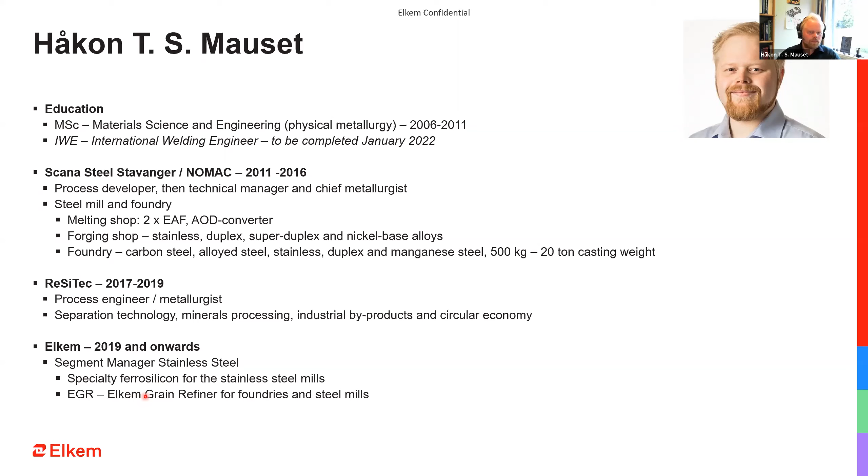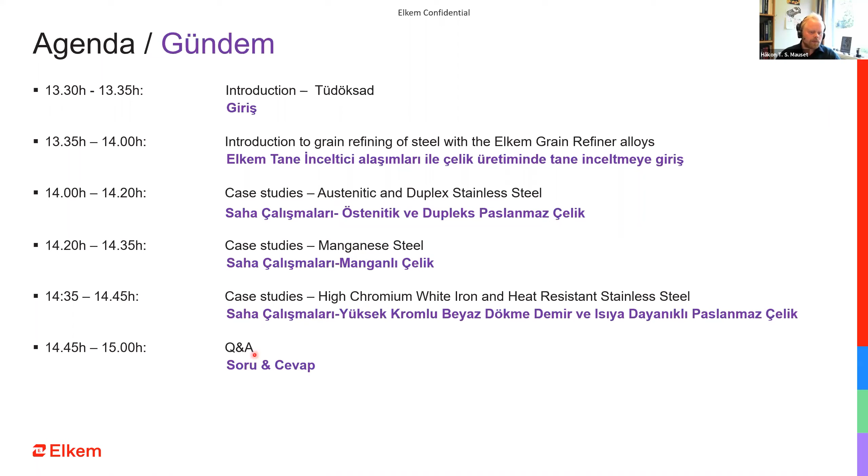So then I think we can just start to look at the agenda. We've had an introduction now first from Tüdöksad. Then the first part will be on the introduction to grain refining of steel with the Elkem grain refiner alloys, some fundamentals. Then we will go into case studies. First, we will look into the austenitic and duplex stainless steels. Then we will look at manganese steel or wear-resistant manganese steels. And then the final part will be on high chromium white iron and heat-resistant stainless steel. And finally, there will be some time for questions and hopefully answers as well.

So, first of all, introduction to grain refining of steel with the Elkem grain refiner alloys. First of all, what do you think are the benefits of grain refinement of steel? Well, what we know theoretically and also from practice is that you get increased strength and toughness. You should get better castability, reduced porosity, reduced hot cracking, and reduced segregation.

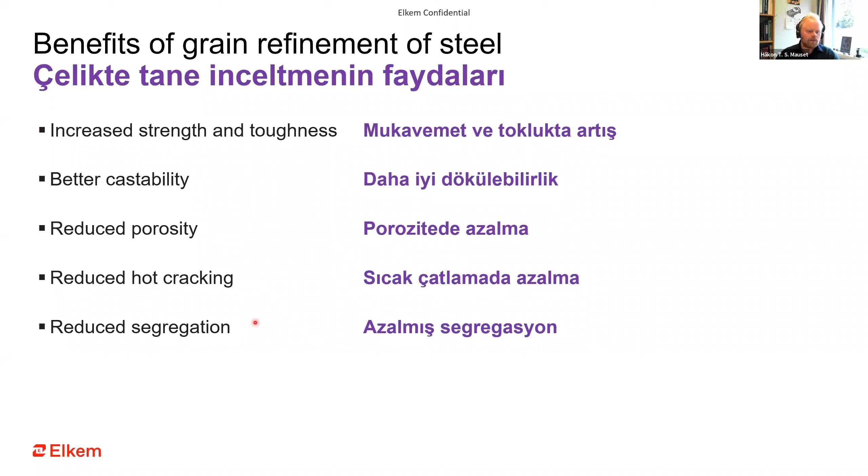Why should we grain refine steels? Well, when we grain refine steels, we can, for example, look at the mechanical properties and the Hall-Petch relation. This relation clearly shows us that the smaller the grains, the stronger the material. So we see from this curve that the smaller the grain size, the higher the yield strength. We actually see that by playing with the microstructure, the grain size, we get better mechanical properties. And also the nice thing about grain refining is that you don't only get strength, you also get better toughness during grain refining.

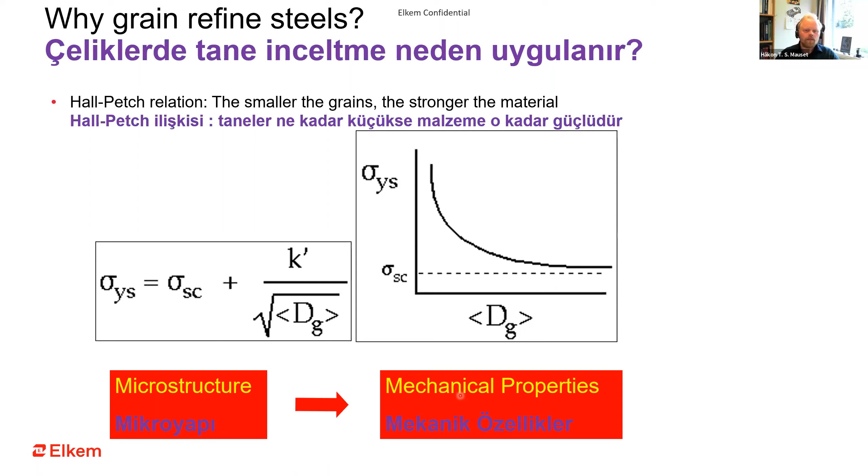So, but how does a grain refiner function? Well, what we believe, and what you see in the literature and theory, is that a grain refiner introduces particles or inclusions into the steel, which should give a finer solidification structure, better castability, and a finer final microstructure for better mechanical properties. Essentially, you create active inclusions in the molten steel, which modifies the microstructure both during solidification and finally, improving mechanical properties.

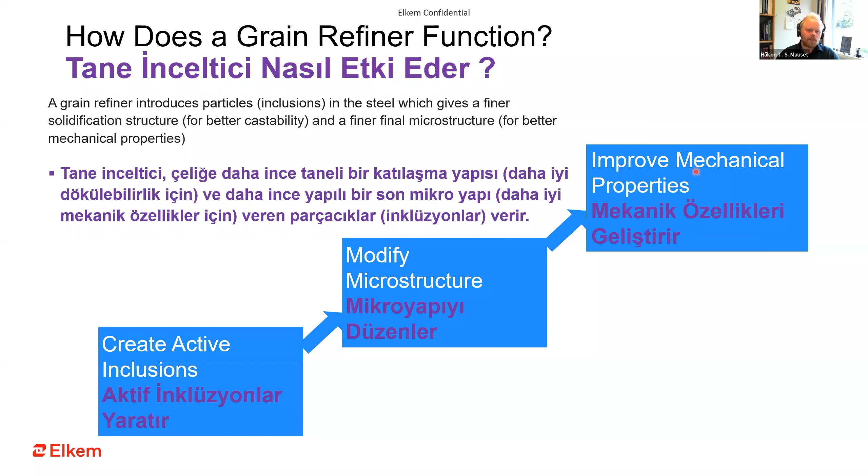But what are the requirements for a grain refiner? You need thermodynamically stable particles. It doesn't help if your particle dissolves in the steel. It needs to be a thermodynamically stable solid particle.

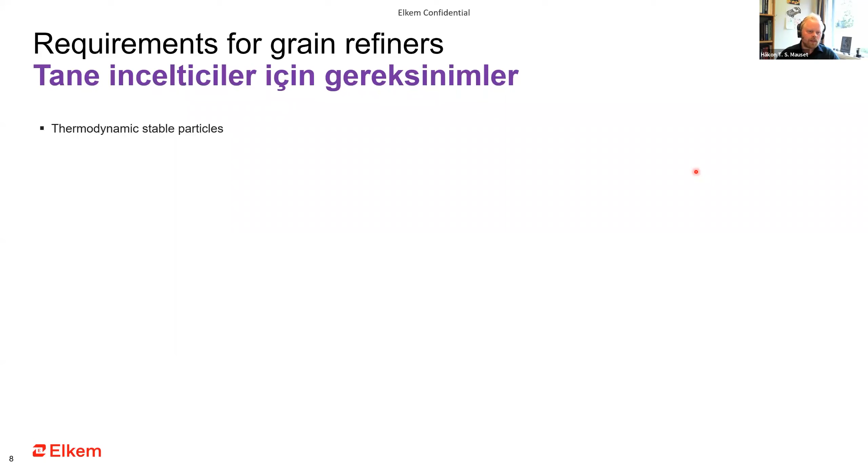And then there needs to be a low misfit between the formed inclusion and the solidifying metal. This can perhaps be a bit difficult to interpret. In this figure, the upper right one, we have degree of undercooling on the y-axis, and degree of misfit on the x-axis. When we speak about misfit, these inclusions or particles used for grain refining can be various oxides, sulfides, or oxysulfides, and the lattice structure of the particle needs to fit well with the solidifying steel.

So if we look at this figure, we see that manganese oxide, MnO, is up at the far right corner. It has a very high misfit between the solidifying steel lattice and the MnO matrix, and you would need a very high degree of undercooling for MnO particles to be a nucleus for the steel. If you look down here, which has very low misfit, it requires very low undercooling - that's cerium sulfide. We also see that rare earth oxides in general require very low undercooling and have a very low misfit.

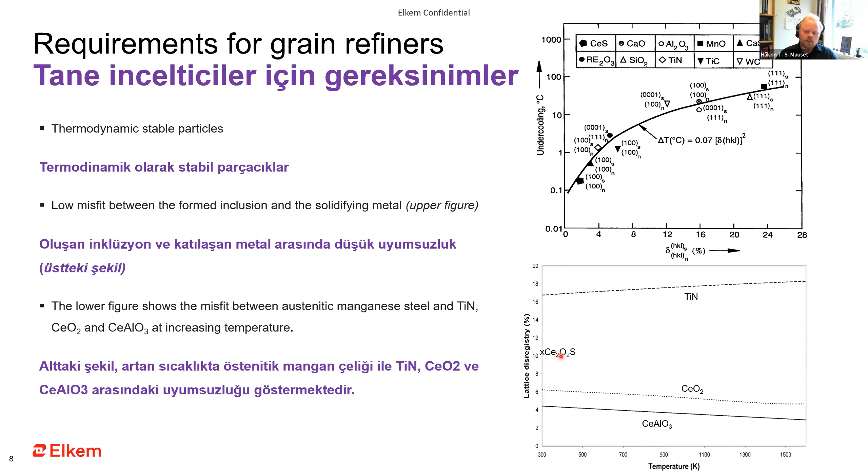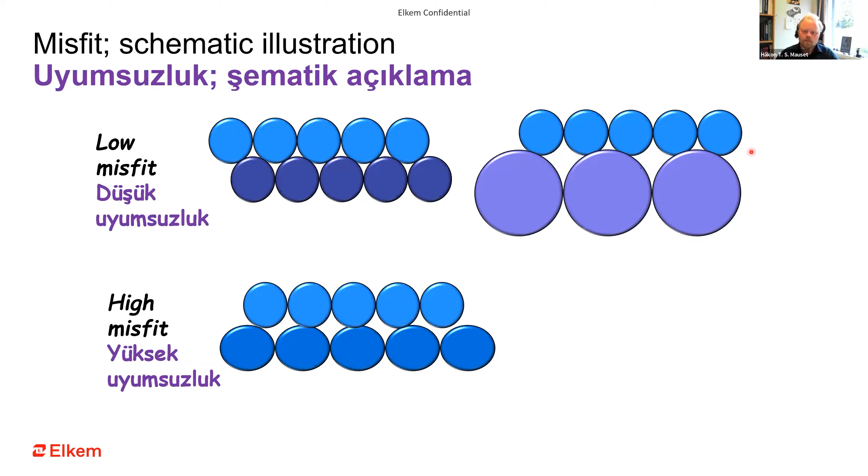So how do we obtain the proper inclusions to get grain refining? Well, we could do like in aluminium, by adding the specific inclusions needed - for example, titanium borides in aluminium. Or we can choose another way, which is what we've done at Elkem: we do it by alloying, so the actual inclusion is a reaction product from the alloy we put into the steel.

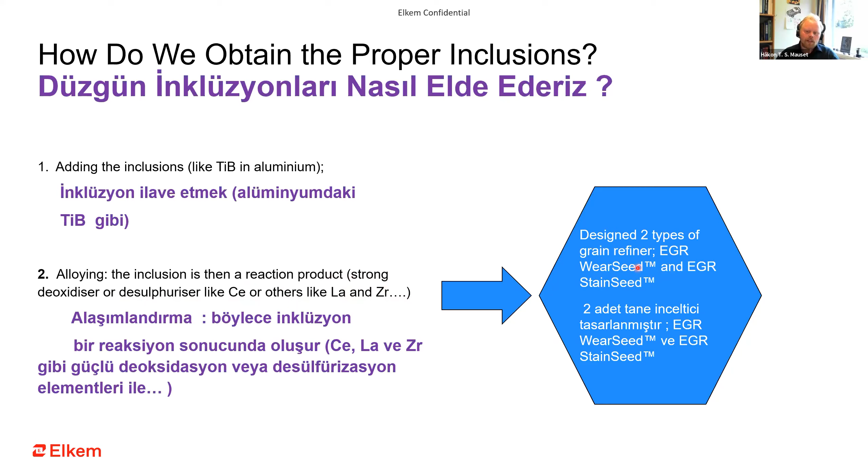Typically it's a strong deoxidizer or desulfurizer like cerium or lanthanum, zirconium, and other reactive elements that you can put into steel. Using this principle, we have designed two types of grain refiners: the EGR WearSeed and the EGR StainSeed. We will come back to them.

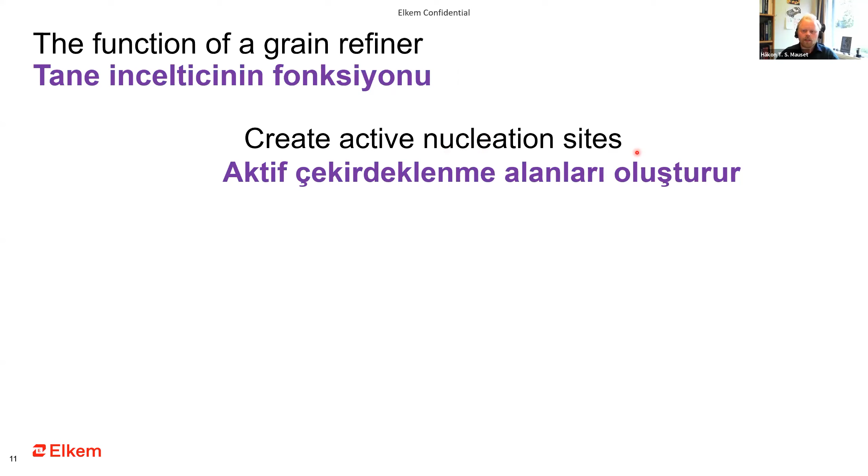So just for a small repetition, the function of a grain refiner is to create active nucleation sites for the solidifying steel. This improves the microstructure, and by improving the microstructure, we get increased mechanical properties.

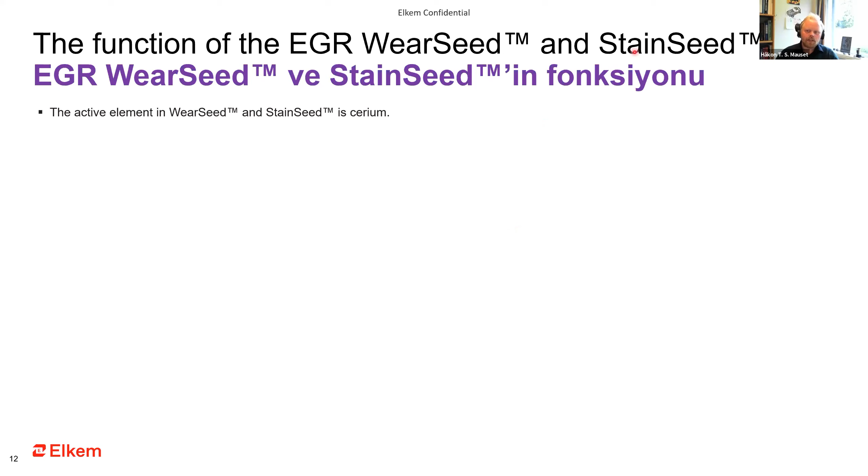So then we go into the actual grain refining alloys that we have in Elkem. That is the EGR WearSeed and the EGR StainSeed. And the active element in both of these alloys is cerium.

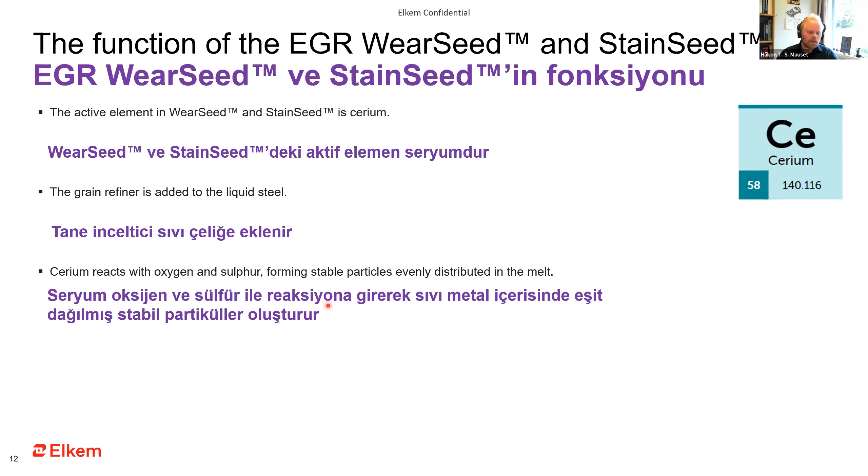The grain refiner alloy is added to liquid steel, and then the cerium will react with the dissolved oxygen and sulfur in your steel, forming stable particles evenly distributed in the melt. Depending on the amount of oxygen and sulfur in your steel, you will create cerium oxides, cerium sulfides, or even cerium oxysulfides. And if you have some dissolved aluminium as well, you can get cerium aluminates in there. All of these are suitable particles to promote heterogeneous nucleation and get grain refining in your steel.

So as I said, all these particles work as heterogeneous nucleation points during solidification.

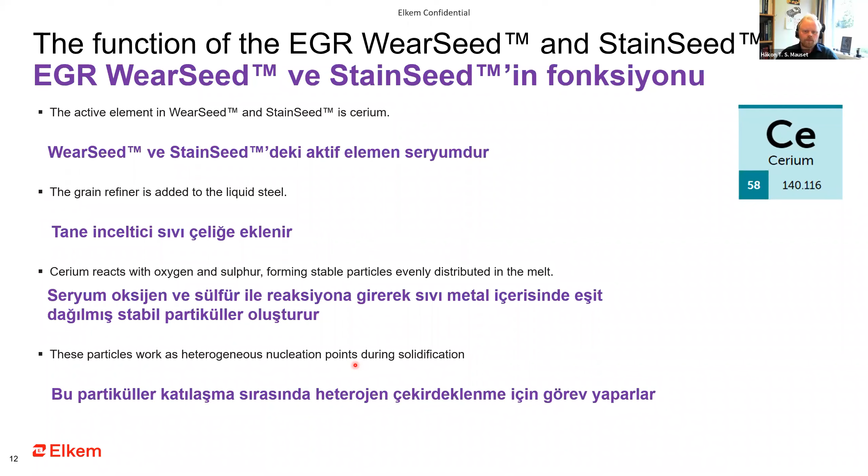So here we have the two alloys. First of all, we have the StainSeed, which is meant to be used for stainless steels. Its nominal chemistry is about 10% cerium, 20% silicon, 30% chromium, and then less than 0.15% carbon, as most stainless steels are very low in carbon. Iron makes up the balance.

The WearSeed is designed for manganese steel. Here we have quite similar, 10% cerium, 24% silicon, then 10% chromium, as a lot of manganese steel contains some amount of chromium. We have 24% manganese, and the carbon is less than 1%, which should be okay, as most of these manganese steels contain more than 1% carbon anyways. Iron is the balance of this alloy as well.

The standard sizes that we have for both of these alloys are 2 to 20 millimeter, and then 0.2 to 2 millimeter. But it can also be delivered as cored wire on request. And as I mentioned, the chemistry for both of these alloys mentioned here is the nominal composition.

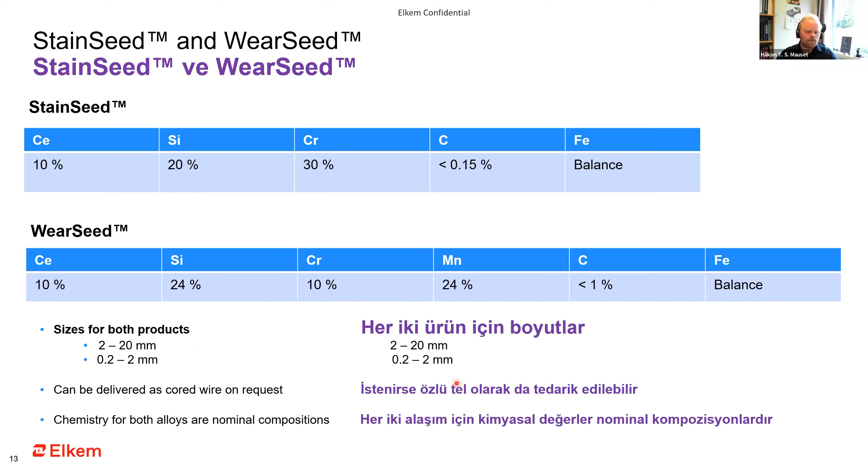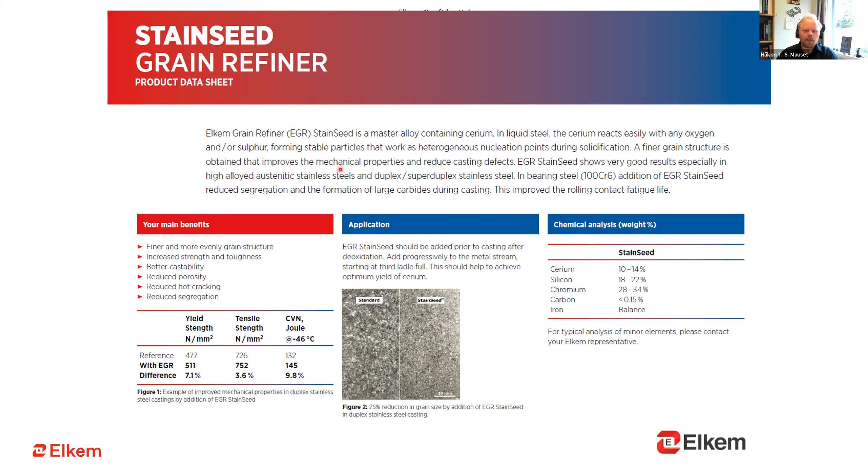So here you have the first page of the data sheet for the StainSeed grain refiner, which can be obtained by contacting Elkem. I will not go too much into this - as I said, this is just the first page, describing the alloy and showing some applications. We of course have the same for WearSeed, and both of these can be obtained from Elkem.

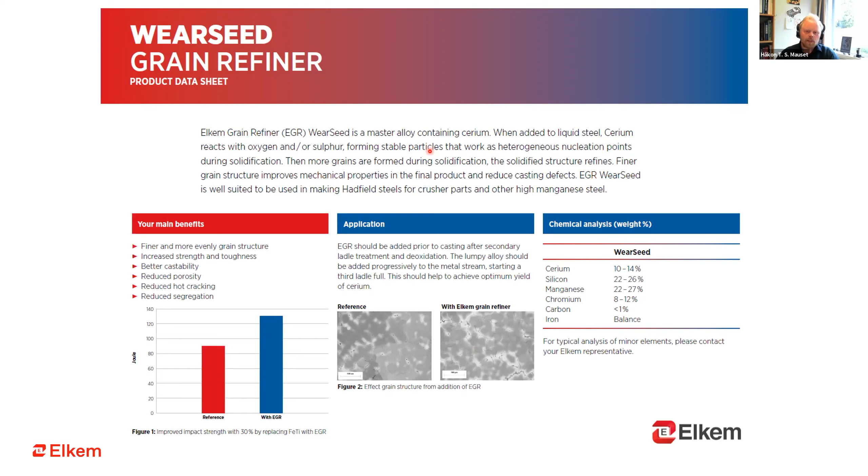So then we will look a little bit into how we actually add EGR during the production of steel.

The addition rate of EGR WearSeed and StainSeed is normally 6 to 7 kilograms per ton of steel. What we aim for is approximately 0.04 weight percent of cerium, or 400 ppm of cerium in the steel.

And the way we add the EGR into the steel is very important to do correctly. Typically, the addition of EGR is something you do just before casting. So typically here you have your induction furnace, your electric arc furnace, or your AOD converter, and you start to tap steel into your ladle.

So here we have the ladle. Usually you should try to fill it up about 1/3 with steel, and then you should start to add the EGR WearSeed or StainSeed. The alloy should be packed in bags, paper bags or plastic bags, between 5 to 10 kilograms in each bag. Then you should try to add it as evenly as possible between 1/3 and 2/3 filled ladle.

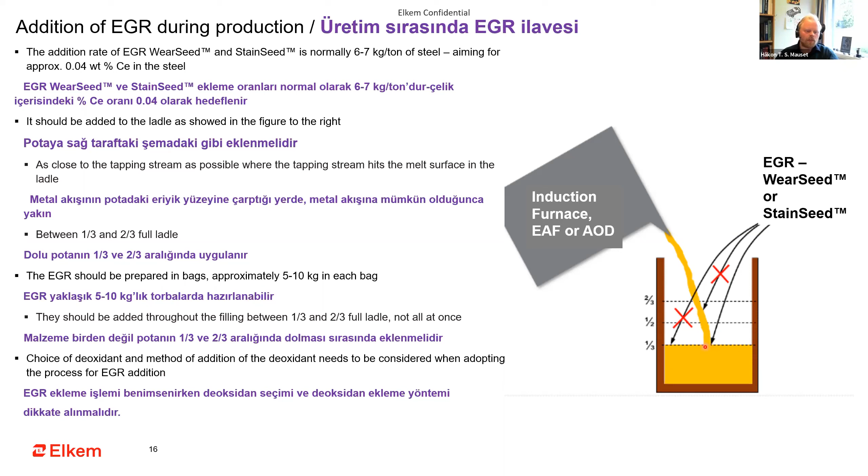So then we are actually finished with the general introduction to EGR. Now we will go more into the case studies. And then we will start off with the austenitic and the duplex stainless steels, and also super duplex.

So, what do we think that we theoretically can achieve by grain refining of stainless steels? Well, we expect to get a smaller grain size. We should have less segregation in our casting. This should give us better mechanical properties. Should give us less casting defects, and we should also get less weld repair on the castings.

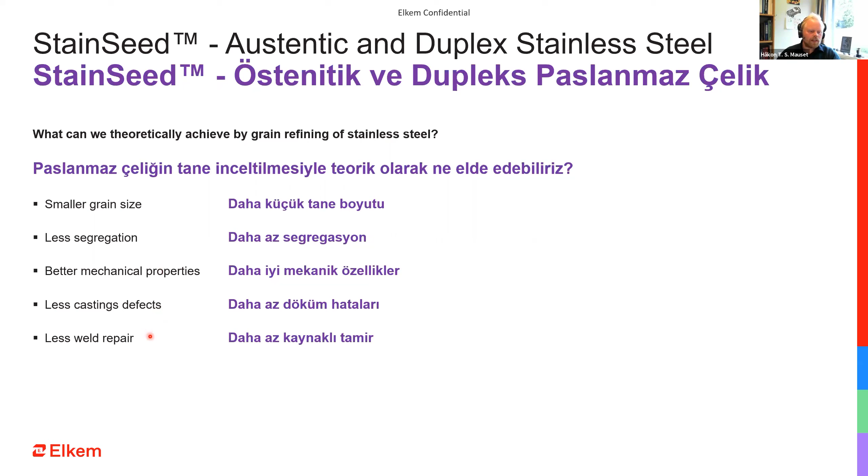This first case here is not from a foundry. This is from a steel mill producing ingots. This is the steel grade called 254 SMO. You see, it's a very highly alloyed super austenitic steel. 20% chromium, less than 1% copper, 6% molybdenum, and then around 18% nickel. Also, you see a lot of nitrogen. So it's a really highly alloyed steel, and usually segregates a lot during solidification.

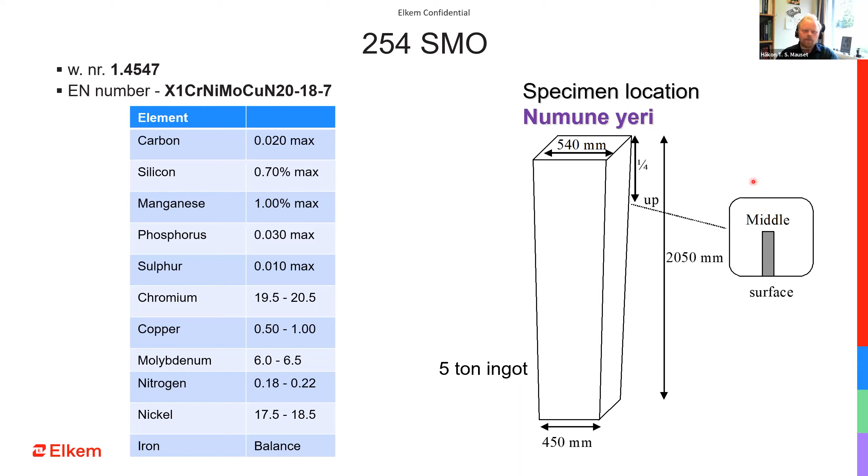But for this specific trial, a 5-ton ingot was cast. You can see it's about 2 meters high and 540 millimeters here on top. So what they did was that a quarter from the top, they cut out a slice, and then they took out this test sample here from that slice. So here you have the surface, and here you have the middle. 70 millimeters from the surface of the ingot.

Before this steel mill used mischmetal for grain refinement of this alloy, and mischmetal is of course a mixture of cerium and lanthanum. This is how the microstructure looked like 70 millimeters from the surface - quite coarse grained. While here you have the results after they used Elkem grain refiner with just cerium. You can see there is a big difference in the microstructure here - a much finer dendritic structure when they replaced mischmetal with EGR StainSeed.

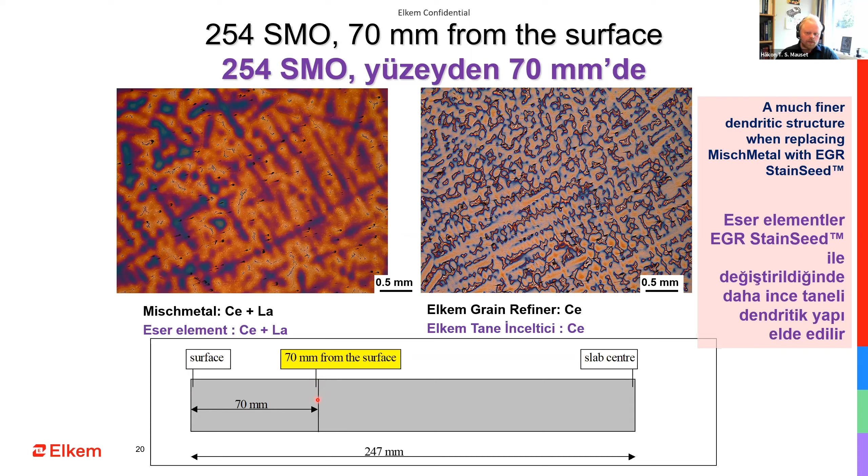So this is the test bar that I showed you earlier. Here we have the surface of the ingot, and now we're looking 70 millimeters from the surface. If we then go into the center of the ingot, we see it's an even more coarse structure when they used mischmetal. And here you can see it's much finer with the EGR StainSeed.

And what they actually saw was that normally this steel mill, they had a lot of problems when they were forging these ingots into bars. They got a lot of cracking during forging, and they had to do a lot of grinding of the ingot and also the forged bars. So it took a lot of time, and they lost a lot of money when producing these grades. But when they started to use the EGR StainSeed, they had no problems anymore with cracking during forging.

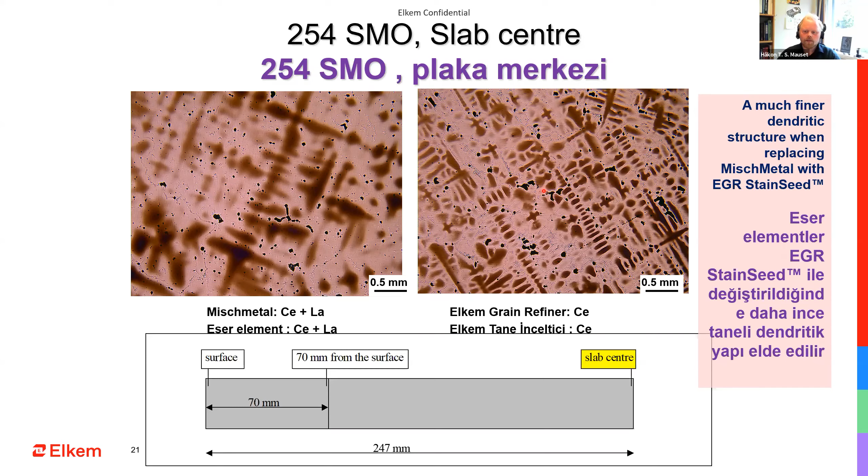Then the next trial was 254 SMO castings at a foundry. They had problems achieving the mechanical properties for these castings. Both impact strength and also the tensile strength was a problem. And they had problems with the surface. They had to do a lot of weld repair on these castings. I think it was valve bodies. But when they started to use...

EGR StainSeed, the Charpy impact properties went up more than 65%, and they saw less variation between the single values. As you all know, during Charpy testing, you have 3 samples that you test, but the variation between each of these samples was very, very little when they started to use EGR StainSeed.

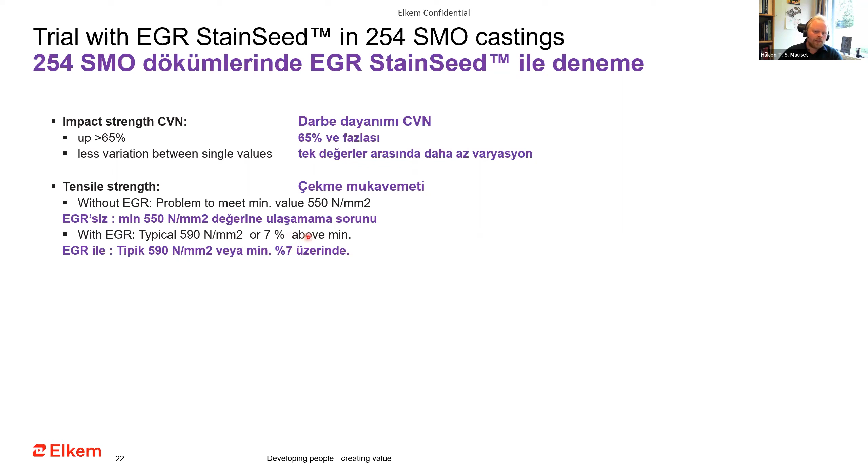With regards to tensile strength, when they didn't use EGR, they had problems to meet the minimum value of 550 megapascals. But with EGR, they typically achieved 590 megapascals, so more than 7% above the minimum requirement. The yield strength, they had a problem to meet the requirement of 260 megapascals, but with EGR, they achieved 290 megapascals, so 11.5% above the minimum requirement.

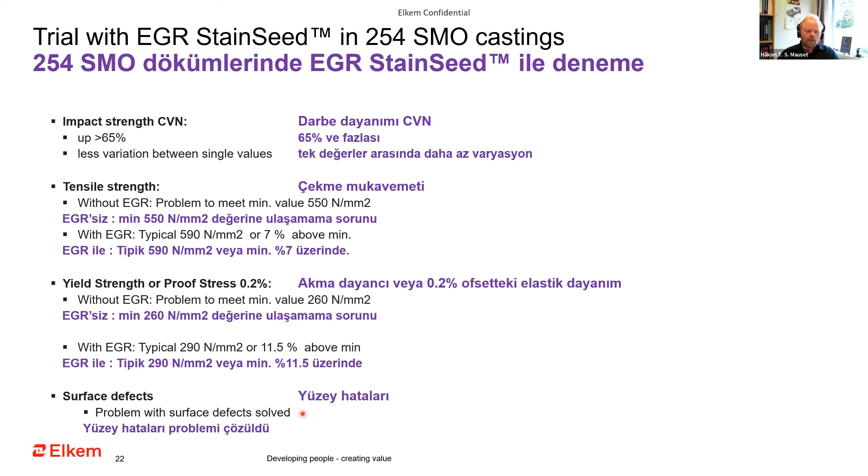And as I mentioned, they had a lot of surface defects, which they needed to grind and weld on, but the problem disappeared when they started to use EGR. So I think they didn't have any weld repair connected to the surface anymore. This is not the exact component, but this is a typical valve body.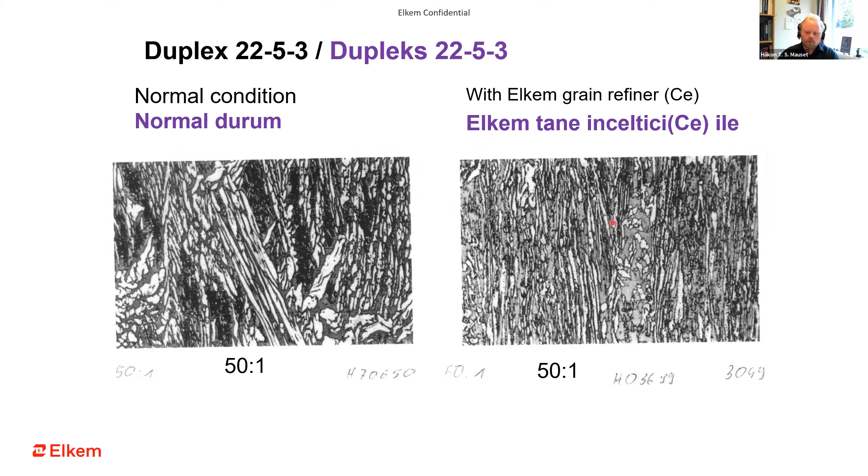And then with the Elkem, when they started to use the Elkem grain refiner, this is how it looked. So we see that the spacing between the ferrite grains is much more narrow when they started to use the Elkem grain refiner. So there is a definite grain refining here.

Then we have the 4A duplex, which is the 22 chromium duplex, but in cast version. This is not a customer, this is the reference casting, showing how their duplex structure looked like without any EGR in it. And this is how it looked when they added EGR. You can see it's lots smaller ferrite grains here.

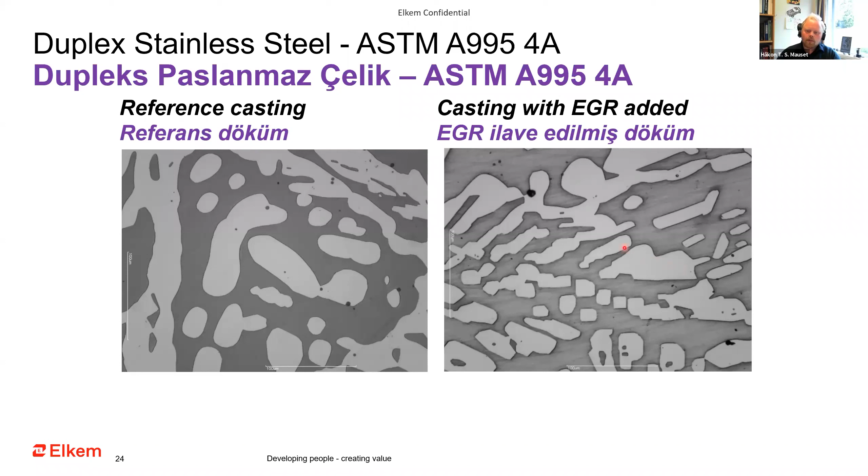So here we have, this is also the 4A grade. Here we have the reference. You can see that we have a quite big columnar zone, quite coarse columnar grains. And then we have this equiax zone here, where we see the grain size of the equiax grains. And this was without EGR.

But then when they start to use StainSeed, you can see there is very little columnar zone, and we can see that the equiax grains are much smaller. So the actual grain size in the equiax zone was 1.75 millimeters. And when they started to use StainSeed, the grain size in the equiax zone was 1.3 millimeters. So there was a reduction of 25%.

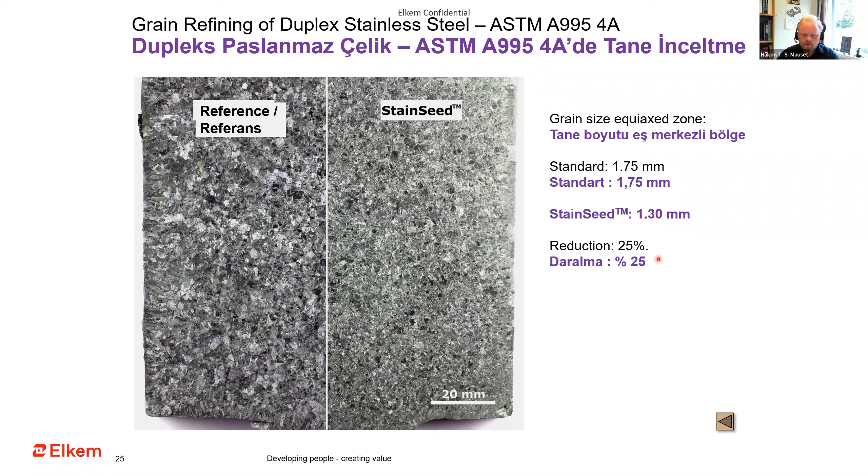So we're still at the 4A duplex grade mechanical properties. We will not dive too much into all of these numbers, but we typically see that for the yield strength, the reference was 477 megapascals. They achieved 511 megapascals, so that's 7.1% change. For tensile, the same, went up from 726 to 752, that's 3.6% change. And then perhaps the most important is the Charpy values.

You can see here that there is quite a lot of deviation between the 3 samples here. The average is about 132 joules. But if you look at the one with EGR, there is much less variation between the single values, and then we're at 145 joules. So an increase of 9.8%.

So this one you see here in these figures as well, that there is an increase in both yield and tensile strength when EGR is added. And for these grades, the most important is of course the impact strength. So you can see here that the reference, this is the average, but there is a big spread between the values. Well, here we have an overall better average and much less spread.

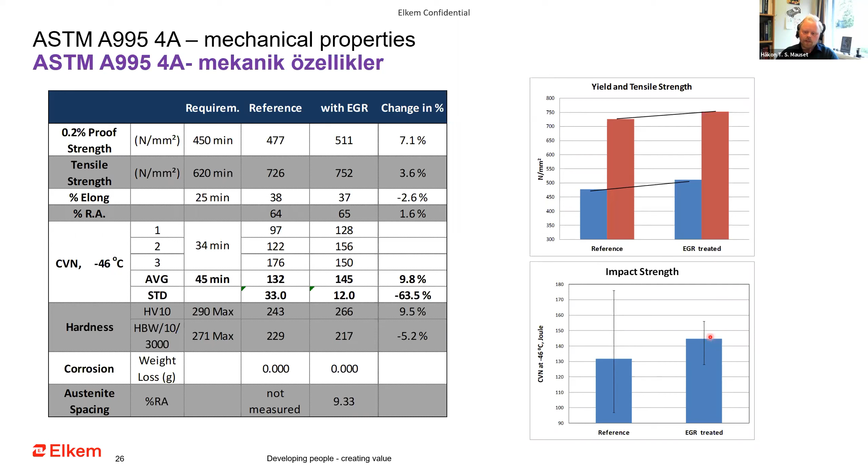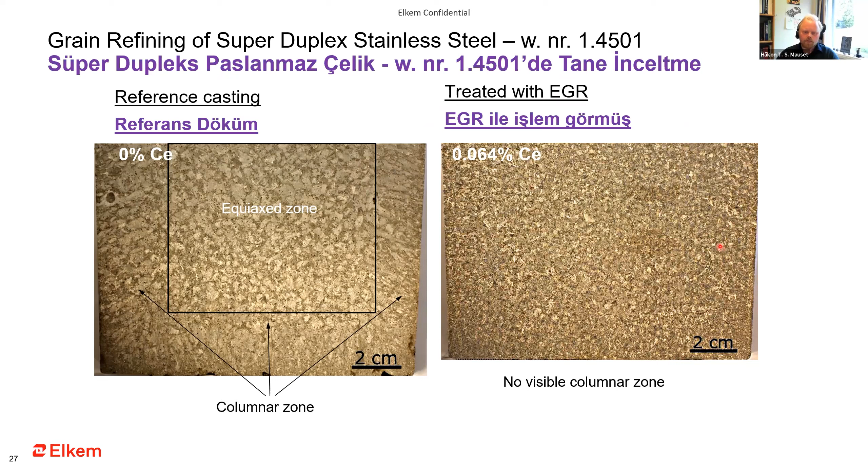While this is the one treated with EGR, here you see we have 640 ppm of cerium in the steel, and there is really no visible columnar zone here, and it's a lot more. The equiaxed grains are much smaller than this one.

So other benefits we've seen with EGR in duplex is better weldability and less repair welding on the castings.

So then we go into the wear-resistant manganese steels. What can we theoretically achieve by grain refining of manganese steel? Well, we think that we can achieve a smaller grain size, less segregation, better mechanical properties. And we think that these better mechanical properties should lead to increased lifetime of the crusher components.

We should get less casting defects. And we also think that by having a better solidification, we should have an increased casting yield, and thus it should be possible to reduce the feeder size. This one we have not worked on yet, we have not documented it yet, but it is something we are looking into. And of course, if you have a smaller grain size, then perhaps you could reduce the heat treatment time of these components.

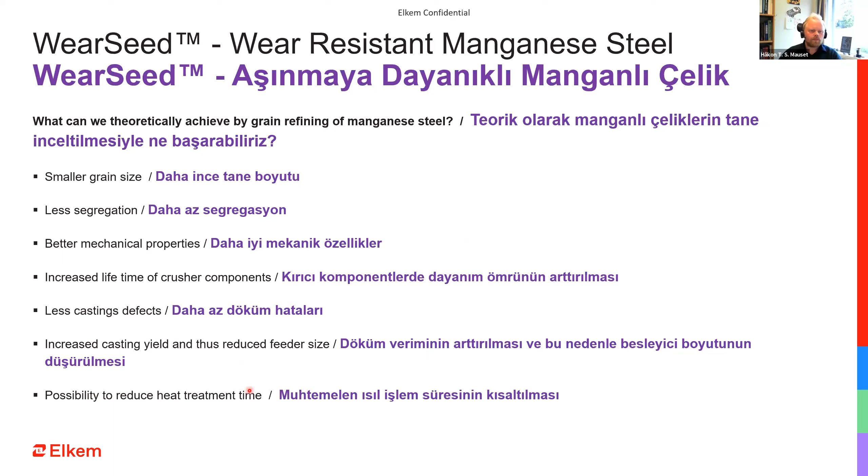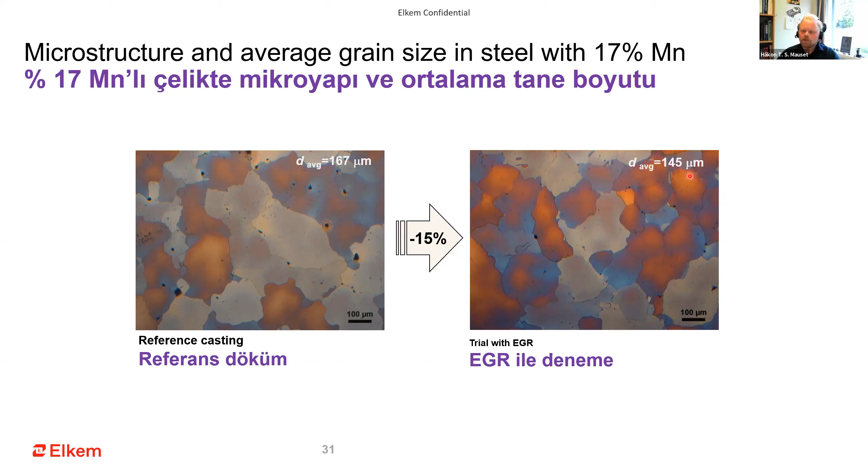So first we have the microstructure and average grain size in a steel with 17% manganese. This is the reference casting. You see the average grain size is 167 micrometers. With EGR, there was a 15% reduction in size, so the average is about 145 micrometers.

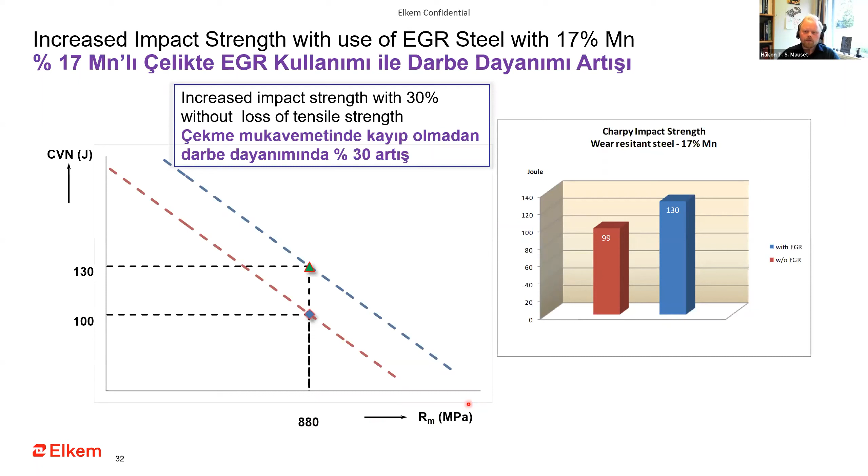Then we can look a bit at a 12% manganese steel with EGR. So for this one, we see what we have seen earlier, the Charpy impact strength at 20 degrees C, typically around 35 joules without EGR, but then up at 60 joules with EGR.

We see sort of the same here, a bit lower with EGR. When we look at the tensile strength, without EGR we are at 780, 800 megapascals, but with EGR we are more up at 840 to 860 megapascals. We also see that the elongation after fracture, the A5, increases as well, typically around 20% without EGR, and 25% with EGR.

So we see here the impact strength is up 50% without any loss of tensile strength. We actually get both increased tensile yield strength and tensile strength, but we also improve the ductility and the toughness of the material, and that's quite rare when you work with steels. Usually you have to choose better strength or better toughness, but here we actually get both, which is in line with theory, of course.

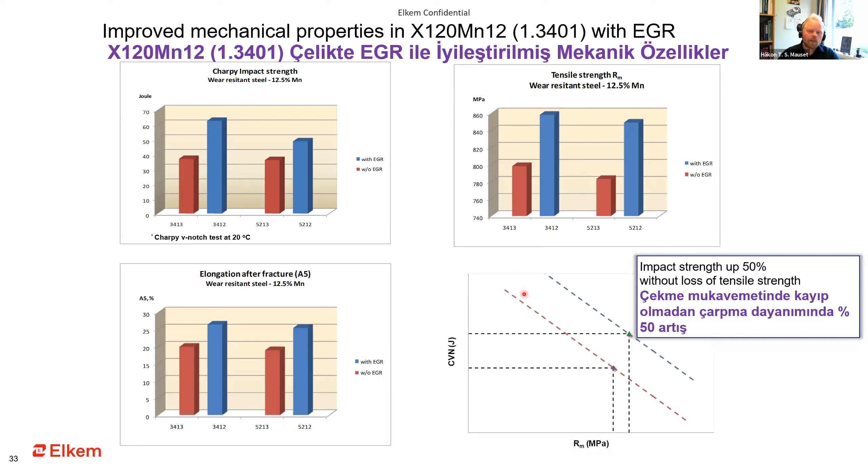Then we have a case with a 20% manganese steel. This is the reference sample. The scale bar here is 500 micrometers, and you see these grains are huge.

The normal practice for this foundry was to add 0.1% aluminium and 0.4% titanium to the ladle just before casting. We did some trials where we kept the aluminium, but skipped titanium, and added 0.7% of EGR instead. Then you can see that the grain size is substantially smaller, so here we have a really big effect of the EGR.

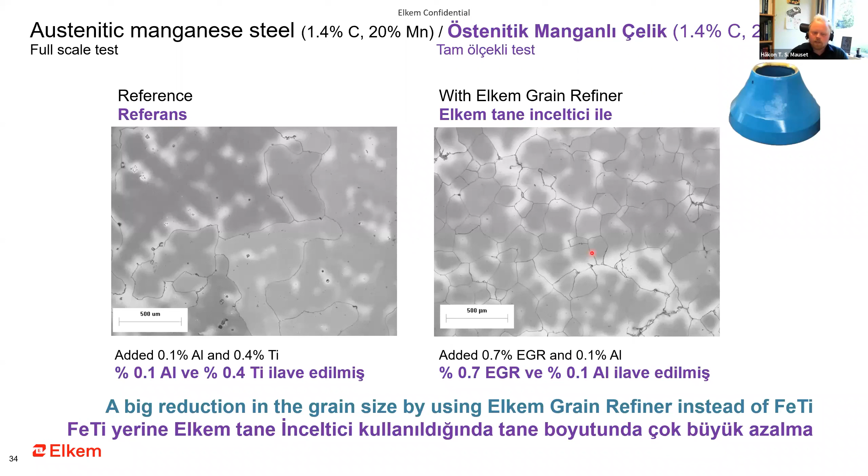Usually for these manganese steels, the foundries are not really interested in mechanical properties because the end user is going to use them to crush rocks, and all they're interested in is the actual lifetime of the components. Of course, smaller grain size should lead to better mechanical properties, which then should lead to a better lifetime for these components.

But this was the first trial where we actually saw an increase in the lifetime. This was shredder hammers made in a manganese steel, around 13% manganese. This is the reference casting. This red line here is 1 millimeter in length, so it's quite coarse grained.

Then when they started using EGR, this red line is still 1 millimeter, but you have much smaller grains. What this foundry, or the customer of the foundry, saw was they achieved a 25% improvement in lifetime of the hammers when they started to use EGR.

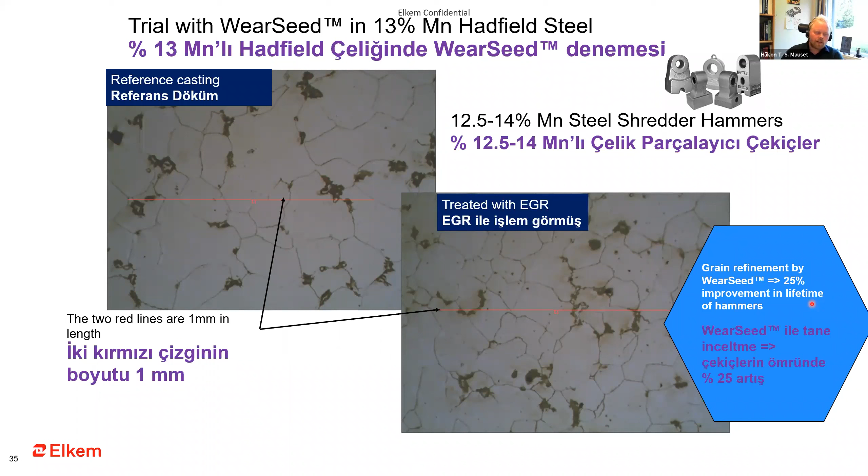But then again, for these manganese steels, we saw that we needed to have more actual lifetime data. The thing is that at Elkem, we have a lot of crushers around the world, and especially in the northern part of Norway, we have Elkem Tana, which is a big quartzite mine. They have a huge jaw crusher and a huge cone crusher.

So we decided to do some trials internally in Elkem. We chose to make a manganese steel of 1.4% carbon, 2.5% chromium, and 20% manganese. We added 6 kilograms per ton of steel of EGR WearSeed. From this steel melt, we made the inner and the outer mantle of the secondary cone crusher at Elkem Tana. The total casting weight of these two components was approximately 5 tons.

These mantles were put in operation at Tana some time ago, and then they measured it. They have a continuous measurement of all the mantles they put into their cone crusher. They saw that these EGR treated mantles had an increase in lifetime of more than 50% compared to the average lifetime for the last 10 years. Actually, when we compared it to the last 3 years, it was actually a 100% increase in lifetime for these mantles. So that is, of course, very good numbers.

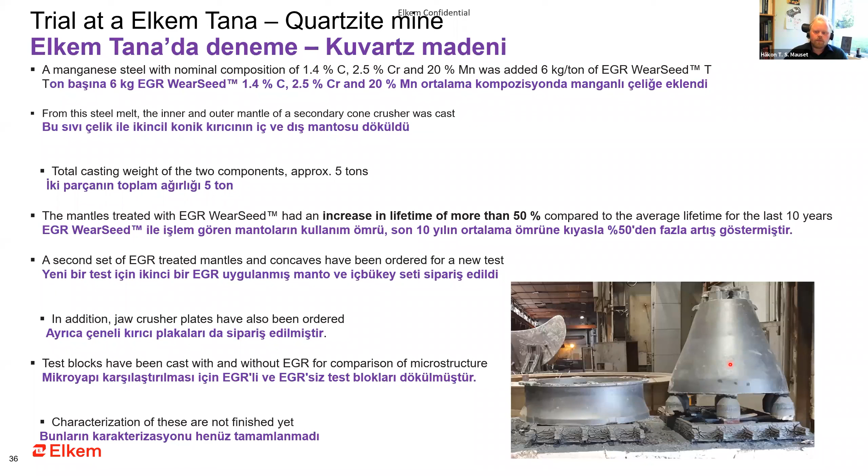So this is a bit of a side story. This is not wear-resistant manganese steel for mining applications. This is TWIP steel, which is typically 20 to 24% manganese, but they are continuously cast, and there are advanced high-strength steels.

So this is the reference casting from a continuous casting machine. No cerium addition here. And this is the side of the as-cast slab. And here we see a really coarse-grained columnar zone, and we see this typical cross here. And this is the center of the slab. Here you still see there's really large grains, columnar grains.

But then a trial was done with EGR. You can see that we have around 700 to 800 ppm of cerium. Here we have the side of the slab. So see, it's much more fine-grained. You don't see these columnar grains at all. And same here at the center of the slab. It is much more fine-grained, which should make it easier to hot roll later on, and hopefully it will be less susceptible to cracking during casting.

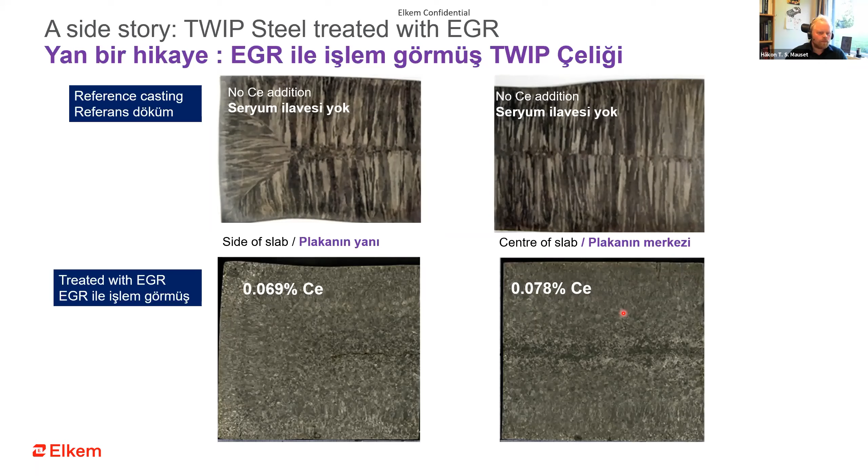So then we're moving into the last part here. We're running a bit fast through it. Now we will speak a bit about high chromium white iron and also heat-resistant stainless steel.

So what do we expect when we grain refine high chromium white iron and heat-resistant stainless steel? Well, as we've said numerous times during this presentation, we expect to have smaller grains. We also expect to have smaller carbides, and we expect that these will be well-dispersed carbides. And of course, we expect to have less segregation.

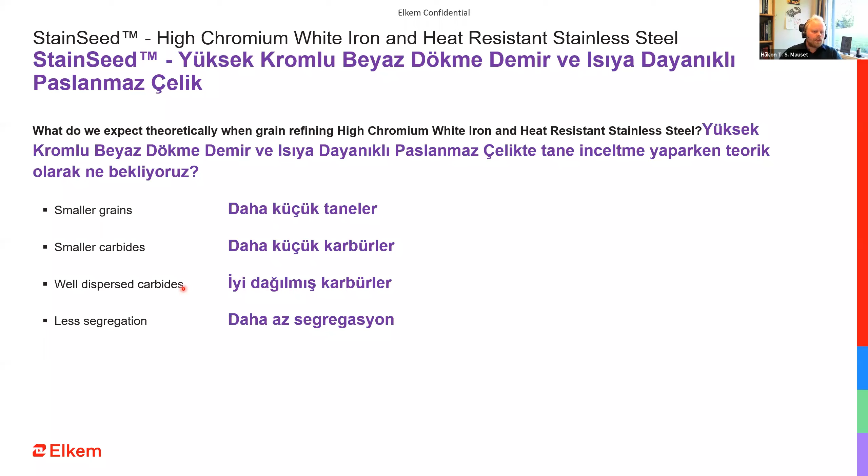Okay, first, high chromium white iron. Here we only have, so far, one case study we can show. This is a high chromium cast iron for rolls used in a steel rolling mill. The nominal chemistry of this grade was 3% carbon, 17% chrome, 1.5% nickel, and 1% moly. Then EGR StainSeed was added with 6 kilograms per ton of molten metal. And here you see the microstructure.

This is the microstructure in the castings without EGR, and this is the one with EGR. So what the customer saw was more and smaller equiaxed grains, and smaller and more well-dispersed carbides. So we saw everything we wanted to see in these high chromium white irons. This is of course a very interesting thing for us to look into, because Elkem has been very good when it comes to gray cast irons and ductile cast irons, where our inoculants promote graphite. But the white cast irons we haven't really worked much on. So we see now that there is an effect of EGR in these grades, and we will be working hard to do more trials at various foundries, to look more into the effect.

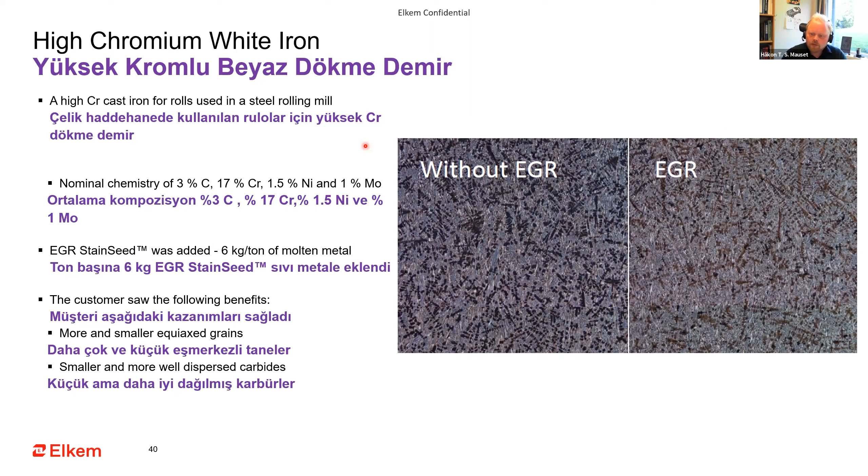Then we go into the heat-resistant stainless steels. This is from a customer. They use the EGR StainSeed, 2 to 20 millimeter, and they add 0.7%, so 7 kilograms per ton of steel. What we see here is cooler plates, and they make these in the ASTM A297, the HH grade, the HK, and the HD grade. So typically the chemistry we see here is 24% chromium, 11% nickel, and 0.4% carbon. So of course these stainless grades are really high in carbon compared to other stainless grades.

But what this customer sees is that the casting life is increased, the lifetime of the components when they are put into operation. Typically this can be used in cement production. So the lifetime of the component has increased, the heat resistance properties are improved, they avoid columnar growth, they see a smaller grain size. And actually this customer gives a much longer warranty on the castings that are produced with EGR than the ones without EGR.

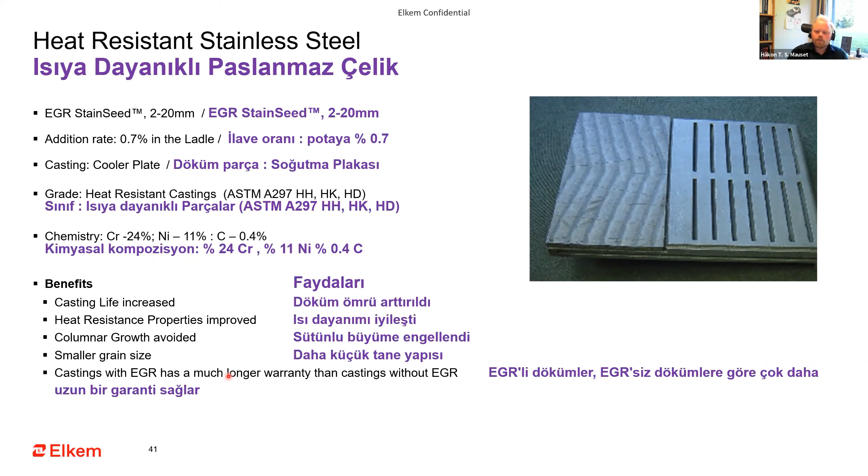Then we go into the exhaust manifolds and turbos. These heat-resistant stainless grades were originally made for industrial applications, like cement plants and steel mills, and everywhere you have high temperature applications.

Exhaust manifolds and turbos have traditionally been made in cast iron. But now we see in the industry that exhaust gas temperatures from engines have a steady increase as we get smaller engines with more turbos. So as temperature is increasing, a lot of manufacturers have to switch to heat-resistant stainless steel. Therefore it's interesting for Elkem to look into these exhaust manifolds and turbos and see if they are suitable candidates for grain refining with EGR StainSeed.

If you look at the typical industrial castings that these grades were made for earlier, they are quite large and thick components, while the manifolds and turbos are usually quite thin-walled. So there is a definite difference there. But the typical grades used by the automotive industry are in the ASTM A297, but with some modifications. It's typically the HF, HH, HK, and HU grade that they use, but often they add some niobium as well to get extra carbides.

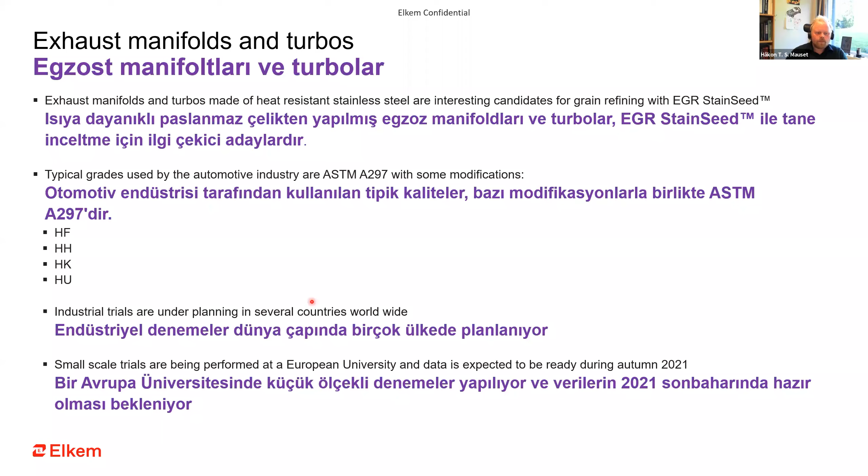Then we have the grade 253 MA. The heat-resistant stainless grade 253 MA is one of very few steel grades which actually has a mandatory cerium content, and you see the composition here. It's a grade that was invented by Outokumpu Avesta many years ago, and it's probably the stainless or heat-resistant grade that can handle the highest service temperature, around 1150 degrees C, and is also very good for cycling between low and high temperatures.

So what you see here is the nominal composition of 500 ppm of cerium. Our EGR StainSeed is supplied to both steel mills and foundries for alloying with cerium instead of using Misch metal. I think a lot of the steel mills and foundries that make these grades use Misch metal, and then they get a lot of lanthanum as well. But we have several customers who use our StainSeed as a cerium alloying agent, not for grain refining, but for cerium alloying. One reason is that our StainSeed has a cerium recovery of up to 70%, while Misch metal cerium recovery is usually much lower. I don't have specific numbers myself, but I've heard 10 to 30% recovery. Also, Misch metal is very reactive when you put it into steel, there's a lot of light and smoke and such, while adding EGR StainSeed, nothing is happening, there's no reactivity.

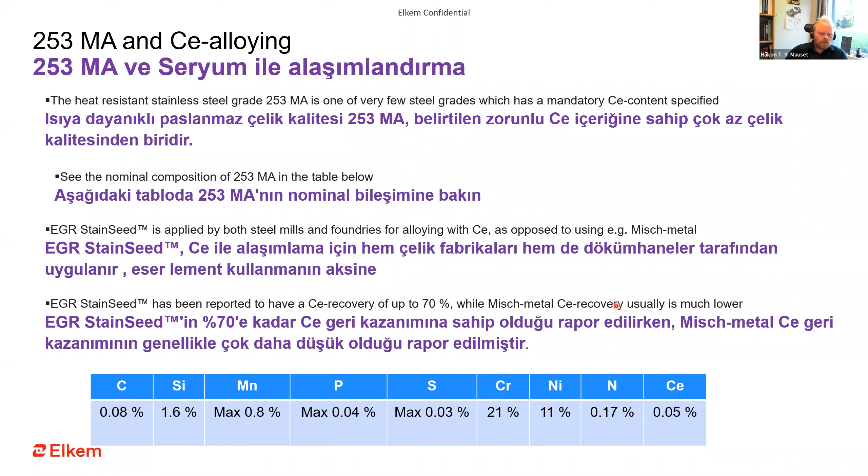So that was it. We finished a bit earlier than anticipated, which means we have more time for questions and answers. The contact info you can see here. Expert is our distributor, so therefore it's best if you contact Arif or Gulan at Expert, but also we have here my contact info.

Thank you, Mr. Mauset. Thank you. It's a very informative presentation, and hopefully steel makers will get lots of benefit from this presentation, because the targets are quite impressive, increasing not only the strength but also the Charpy notch strength and the elongation, quite satisfactory results. That's very good for the results that you have shared with us.

Are you able to see the chat box, Mr. Mauset? Let me see here. If not, you can close the presentation and we can look at the chat box together. It's good, so I can see the chat box, but probably you cannot see it. I can stop. Ooh yeah, the chat box is there. There's a question there. Do you want me to show the chat box, or should I just read it? No, just read it. From Talha Çakmak.